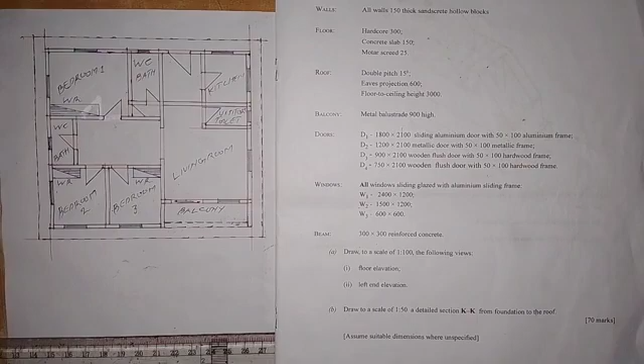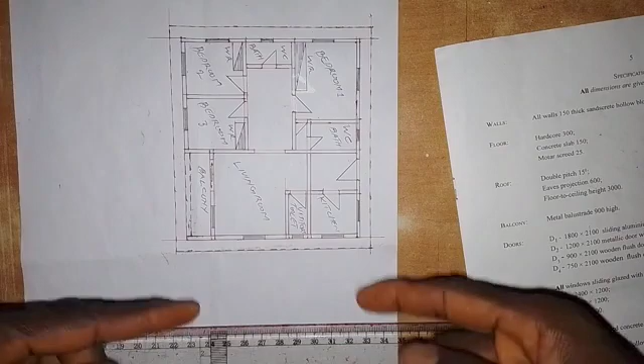So for me to be able to do it quickly, or for you to be able to do it quickly, we are going to turn the paper. So we are going to turn it like this, so that we have the left end there, and we can project lines from this end here, down here, and we draw the left end elevation. So we draw it here on this surface of the paper. So I'm going to take the paper while I pause the video, and when I'm done, I will come back and show you the next thing to do.

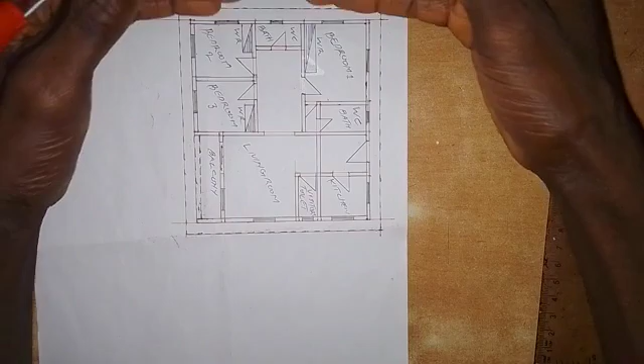Alright, for us to draw the left end elevation, as I've turned the paper and we have this end here. So we are looking at the building on this end here. So we want to draw what we see here, as I said. So we are going to see this corner, and also we see this corner. So I'm going to draw a line from this point. So I will draw a line from here, and take it down here like this. Okay, and then here also, we also have this corner here. Okay, so then I will also draw for this projection.

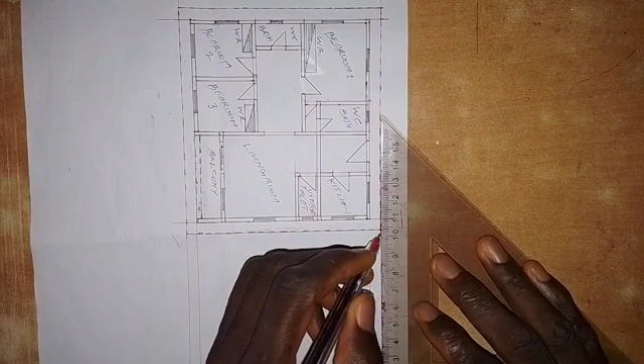So we are still using the same scale, which is 1:100. And also I will see this window, and this window here. So we see these three windows on this surface. So we need to draw a line. So from this point, I'll just set it like this, as I said, set it here, and I will draw this. So I will still project it down. So I don't want to draw on this drawing.

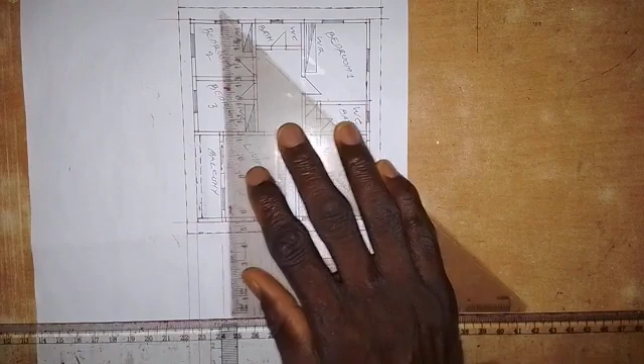Okay, so also, we see this window, and also we are going to see this window here. Alright, so that is all that I need to take from that part here. So the next thing that I'm going to do here, I'll still project this once. So I'm going to draw a horizontal line at this point. So this horizontal line stands for the ground level line. So ground level. So I'll just write GL here. So that is ground level.

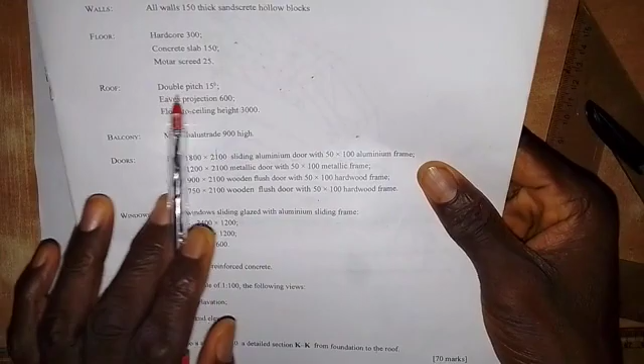So then I will come up a little bit, like 1 millimeter, and I will draw for the floor level. So I'll just take 1 millimeter here. Okay, so I'll also take it here like this. So I will join this together for the floor level. So I'll just draw it like this now. Okay, so the next thing that I'm going to do is, let's look at the pitch angle. So the pitch angle here is 15 degrees.

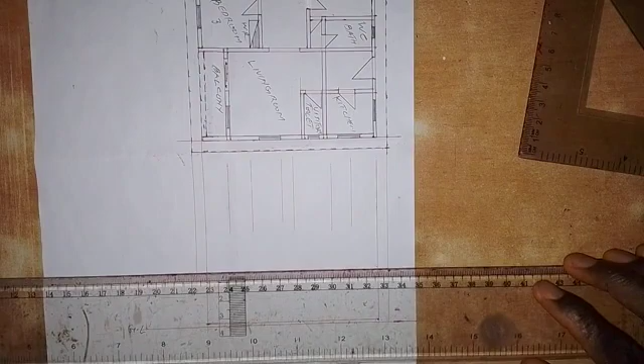But before we take the pitch angle, the floor to ceiling height is 3000. So 3000 by 100 will give us 30 millimeters. So I'm going to take a measurement of 30 millimeters from the floor level here. So this is the floor level. So I take 30 millimeters up, and I will draw a horizontal line. Okay, so just let me take 30 here. So this is 30 millimeters. So here I will draw a horizontal line.

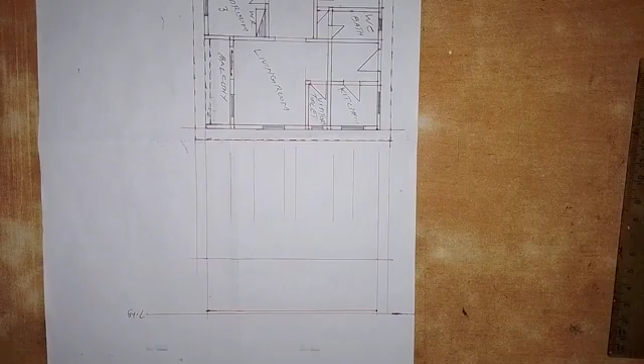Okay, so then the next thing that we are going to do is to take the pitch angle. So the pitch angle is 15 degrees. So here I will set my protractor at this point, and then I will take 15 degrees. So this is 10 and this is 15. So this is 15.

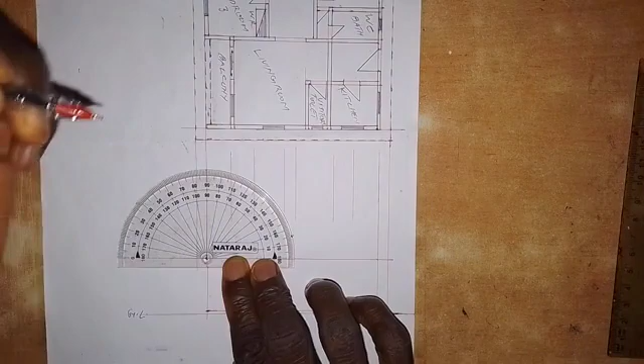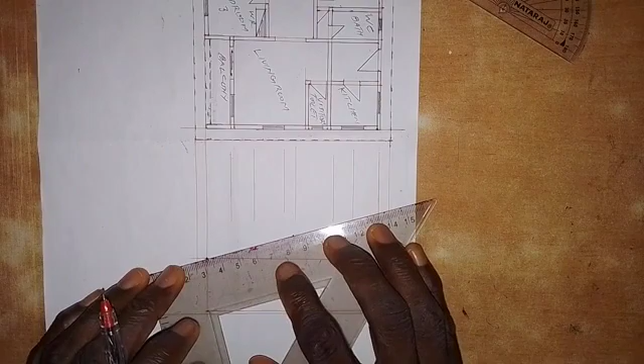Don't forget that this roof that we have here is a gable roof. So this side is also 15 degrees, and we have it at the same point. So what I'm going to do now is draw a line through this point. The line goes like this, and I will also draw from here through this point. All right, so we have this.

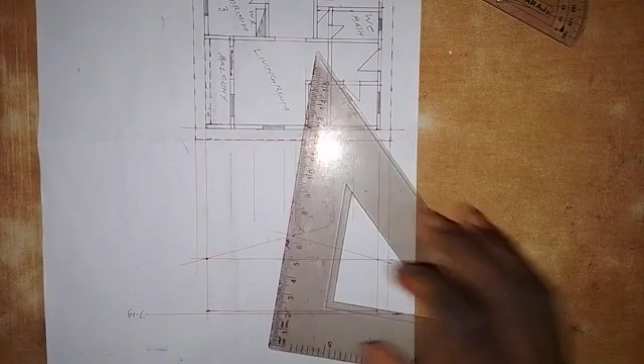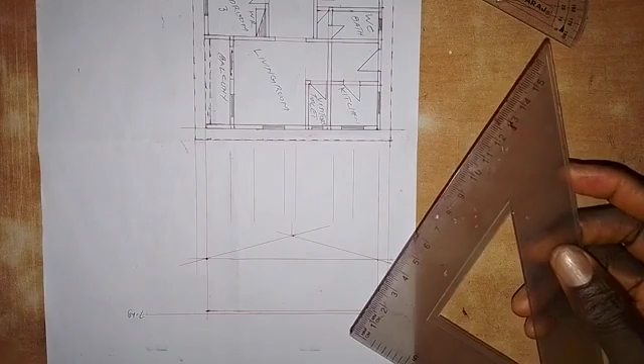The next thing that I'm going to do is draw a vertical line at the meeting point of the lines, so it comes up a little bit. I want to draw a vertical line at this end, but before that let me take the eaves projection. So I will take 6 millimeters down here. So this is 6 millimeters.

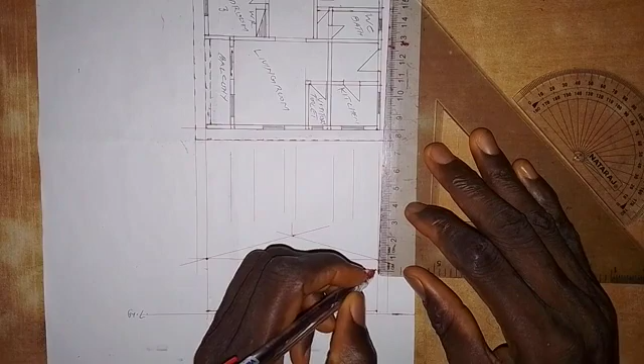So here also I will take 6 millimeters from this point. I will also take 6 millimeters down here like this. So at this point I will draw a horizontal line to this side and also take it to this side. Okay. Alright, so that is what we have for the eaves projection.

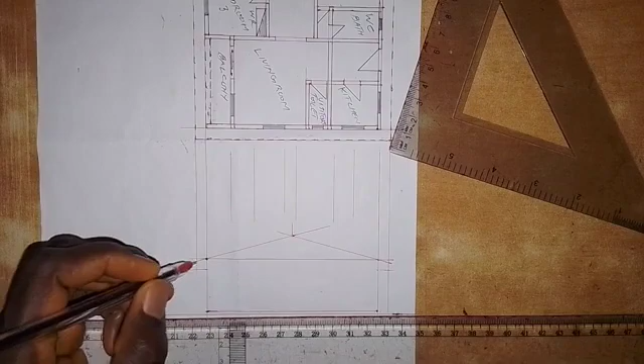So we have drawn a vertical line already, at this point. So now I want to draw a line perpendicular to this point here, where this vertical line meets this line. So setting the protractor at this point, here I have 90. From this point I will just draw a short vertical line.

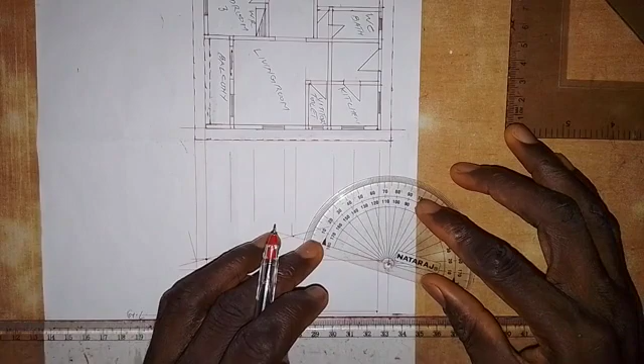Okay, so I'll also do the same thing here on this side. I'll set it at this point here. Okay, so this is 90. So then I'm going to draw a short vertical line from this point like this.

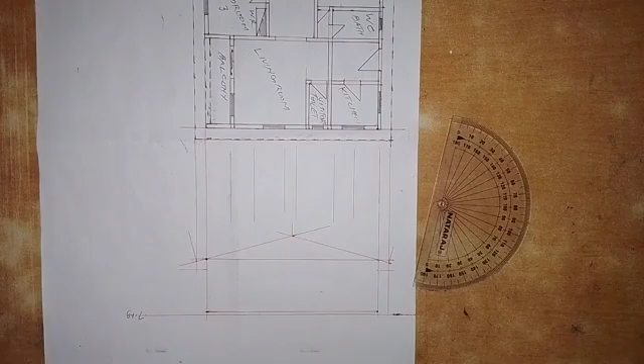So the next thing that we are going to do, we want to draw the fascia board. But I want to make sure that there is a vertical line here that will be parallel to this line. So I need to make use of my ruler with the set square. I'm going to set this, bringing it to this point, and I will draw the line. Okay, so doing the same thing from this point.

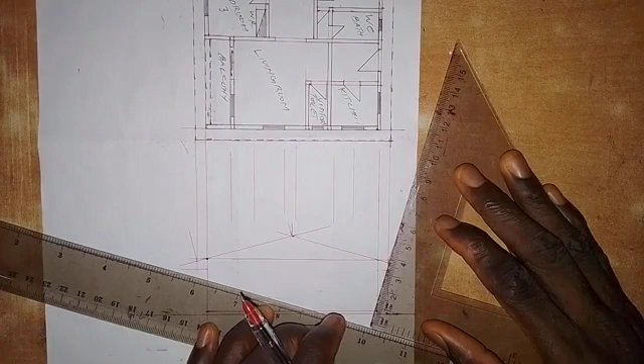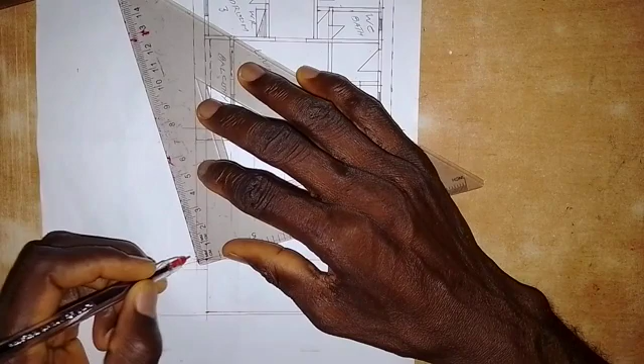Alright, so we have that. Then I'm going to take a measurement of 3 millimeters for the fascia board. So 3 millimeters here on this line, the line that is parallel to this line that we drew here. So 3 millimeters again here. So here I will join these together.

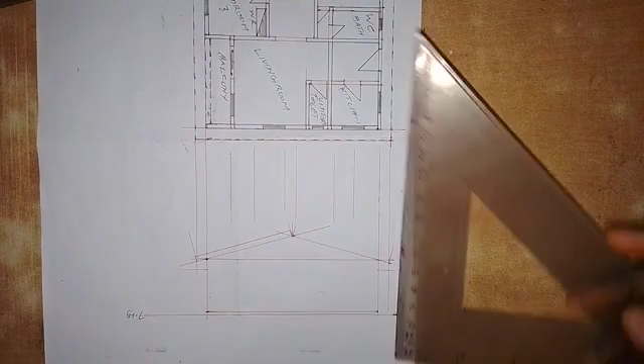Okay. So here I will also take 3 millimeters up. So this is 3 millimeters. Coming here also, I'll take 3 millimeters. Okay, so I'll join these together, and this also. Okay, so that is for the fascia board.

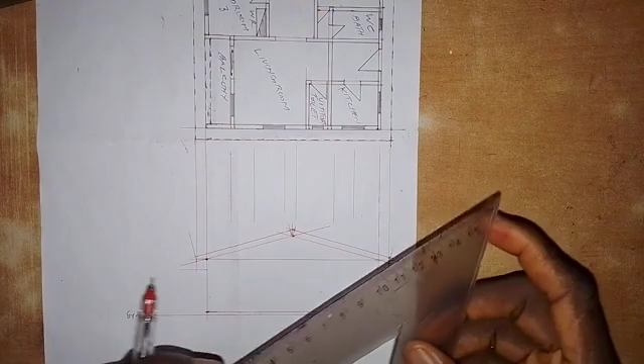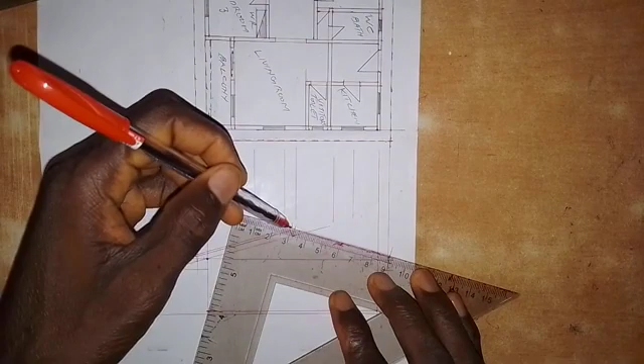So the next thing that I'm going to do is to put the roofing material on this. For the roofing material, I'll just move up a little bit, like 1 millimeter. So I will draw this so it goes beyond it a little bit. Okay, so I think they are equal. So this is the roofing material that we have here.

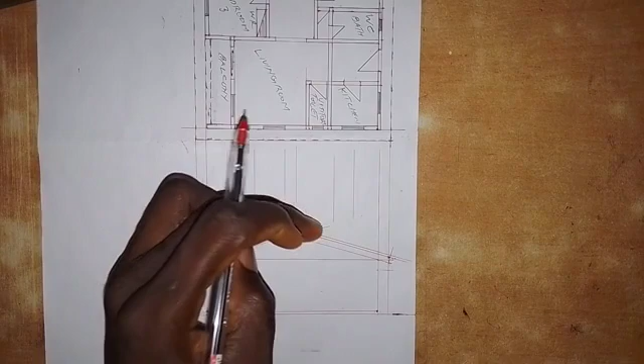So this has to go a little bit down. So this has to be a little bit down. Likewise this, a little bit down. Okay, so the next thing that we are going to do is to put what we call the ridge cap on this.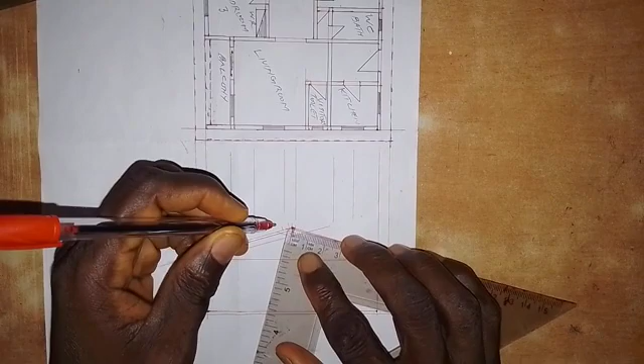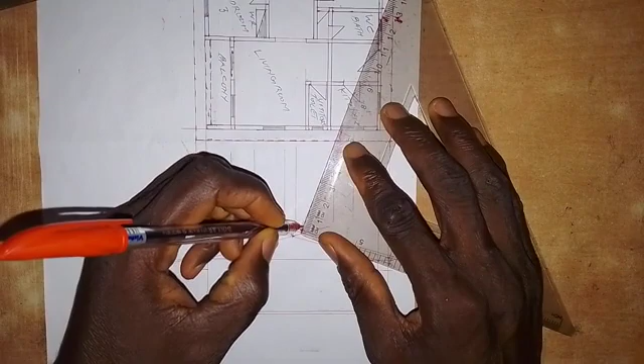So for the ridge cap, let me take 5 millimeters from the center, like this, 5 millimeters from here, and here I'll also take 5 millimeters from the center. So here I will draw this like this, and this also goes like this. So here I'll just take 2 millimeters here, and this also 2 millimeters.

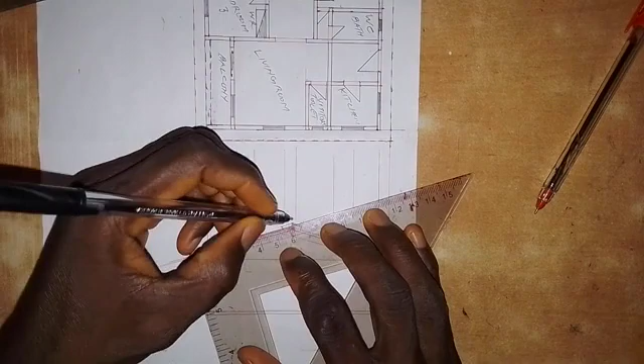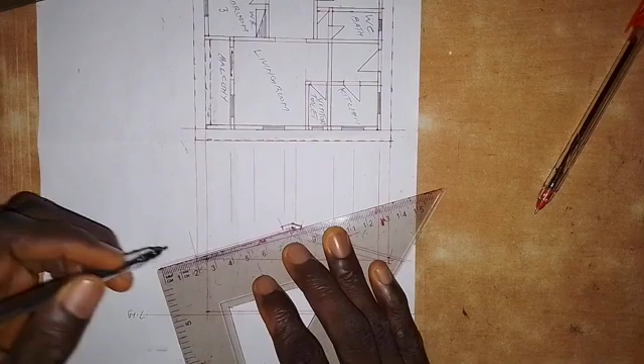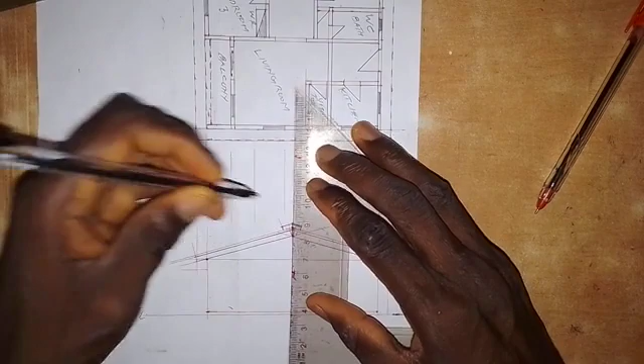So here I'll draw this line, and also here I will draw this line like this. Alright, so then I'm going to make this with a thick line. Okay. Alright, so for the fascia board, I'll make it thick like this. Then, so this is for the east projection.

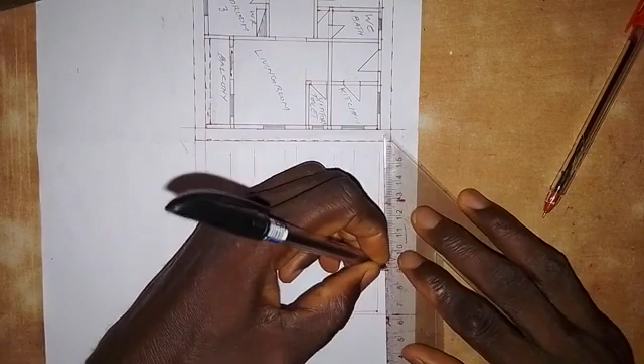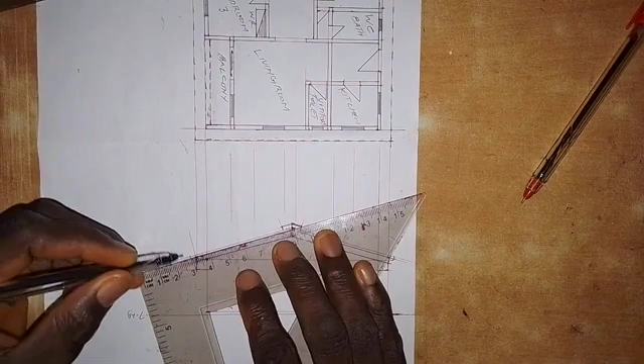Okay, so for the roofing material, I just move away here and terminate it. So also I will terminate it, move away a little bit and terminate it here. So here I'm going to make this a thick line from this point. So also I'll make this a thick line from here to here. Alright, so that is for the roof part.

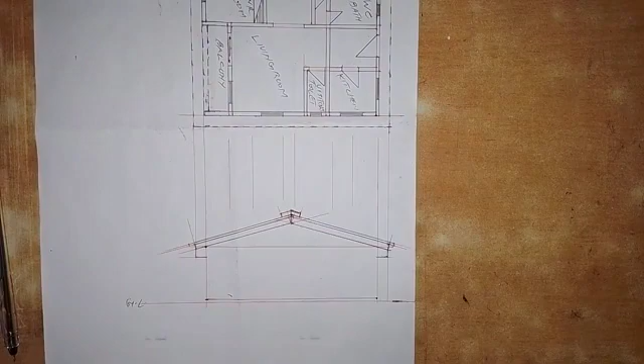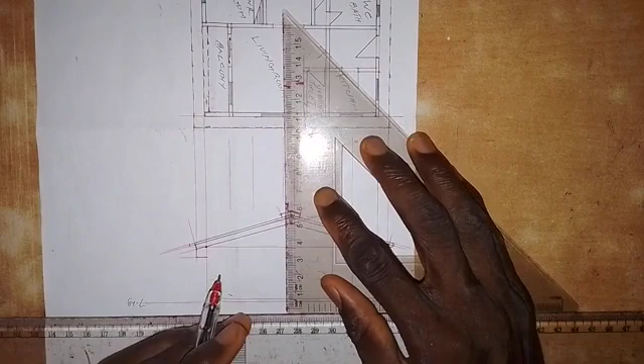So the next thing that we are going to work on: we have the 3 windows that we see here, so we need to draw them. So I'm going to draw a vertical line from here down, and also from here down. Okay. So all the windows will be at the same level. So I'll just come here like this and draw a horizontal line.

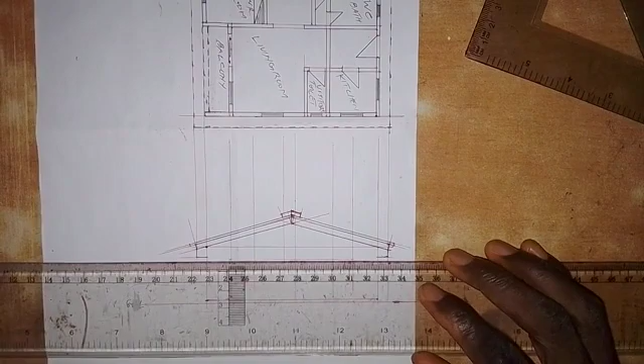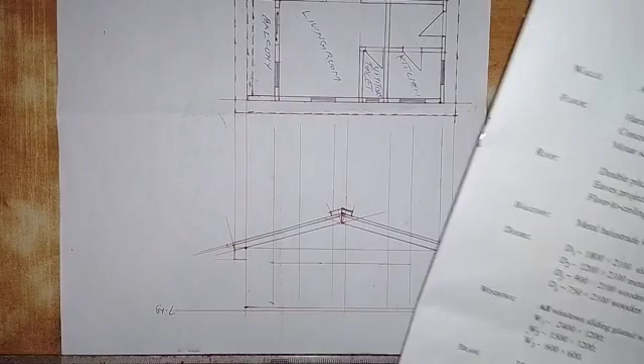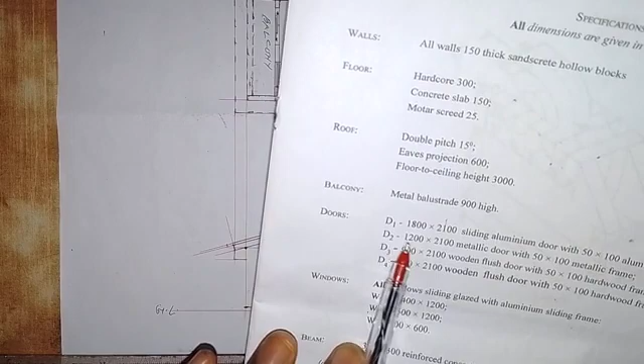Okay. So then we are going to take the height of the windows, as we have here in the specifications. For this one and this one, we have W2. For W2, the height is 1500, and that's going to give us 15. And this one that we have here is W3, that is 600, that will give us 6 millimeters.

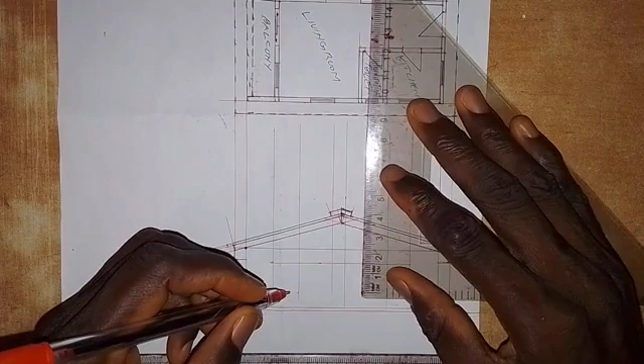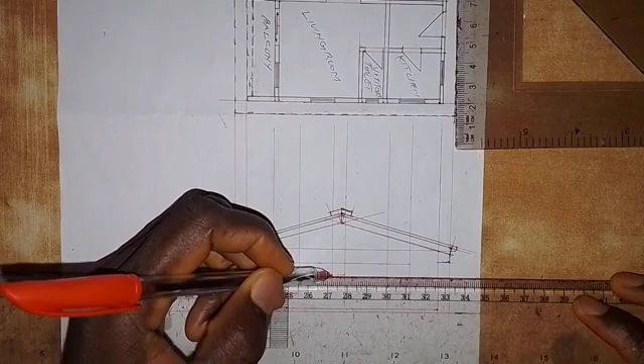So for this one we take 15 millimeters here, and then for this we take 6 millimeters down. So the one of 15, I will need to transfer this line to this side here. So what I'm going to do now, I'm going to pause the video and work on the windows. Then when I'm done, I'll come back and you see what I've done.

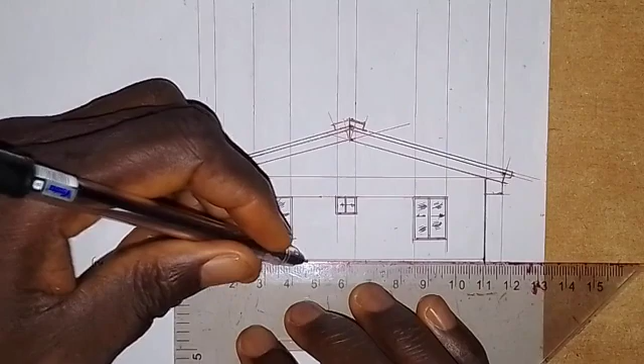Alright, I've worked on the windows, as you can see here. As we are told, all windows are sliding glazed with aluminum sliding frame. So that's what I've done here, and this is how it should look. And for the floor level, we can see the floor level from outside, so we are going to draw the floor level with a short dashes line, as I'm doing it here right now. Okay.

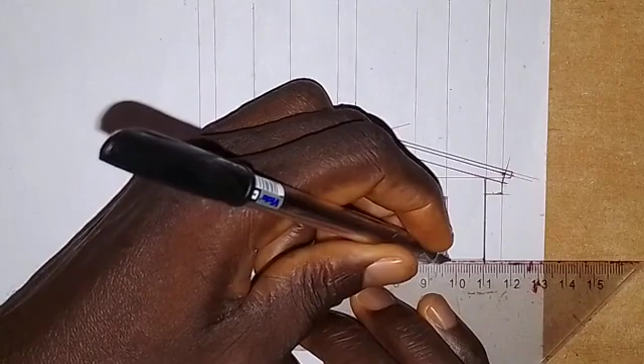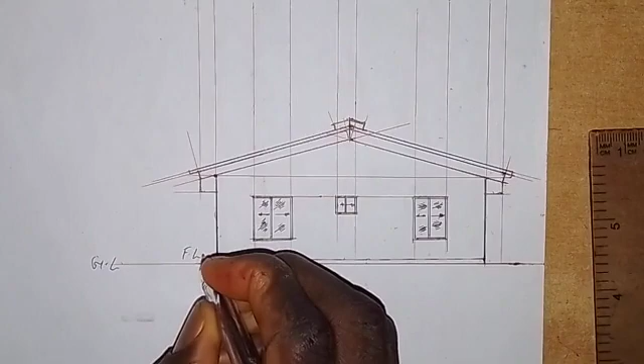Alright, and then the ground level line, we make it with a thick line. So I just need to draw through this. And for the floor level, I also need to indicate it. So write FL here. FL is for the floor level. So that's it. This is how the left end elevation of the building will look. As simple as I've done it here.